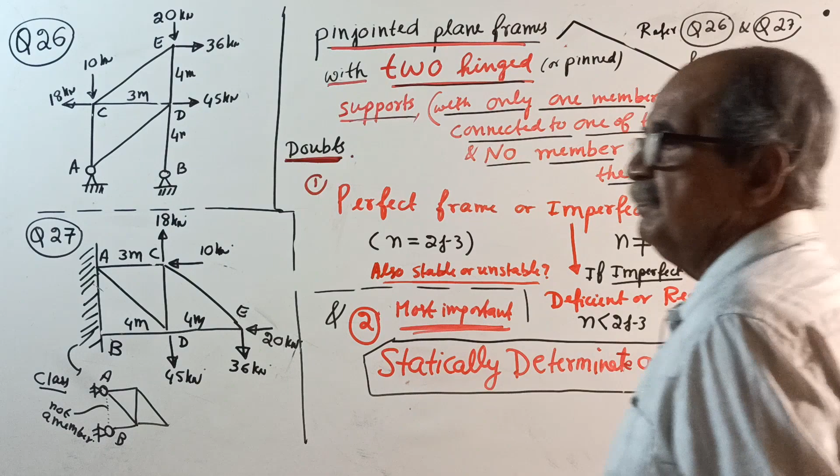Okay, now don't see this side. Never see this side now. Start from here. See, start here. Here start.

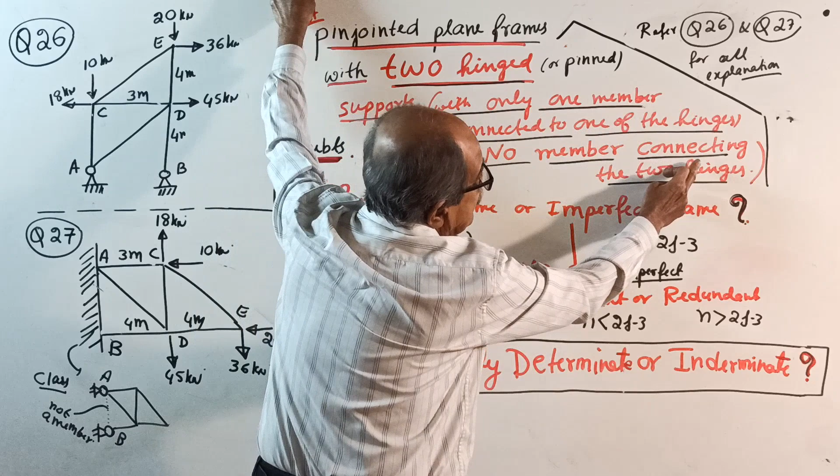Pin jointed plane frames with two hinged supports. Hinged or pinned, I will use the word hinge only. Two hinged supports with only one member connected to one of the hinges and no member connecting the two hinges. This is a special type, remember.

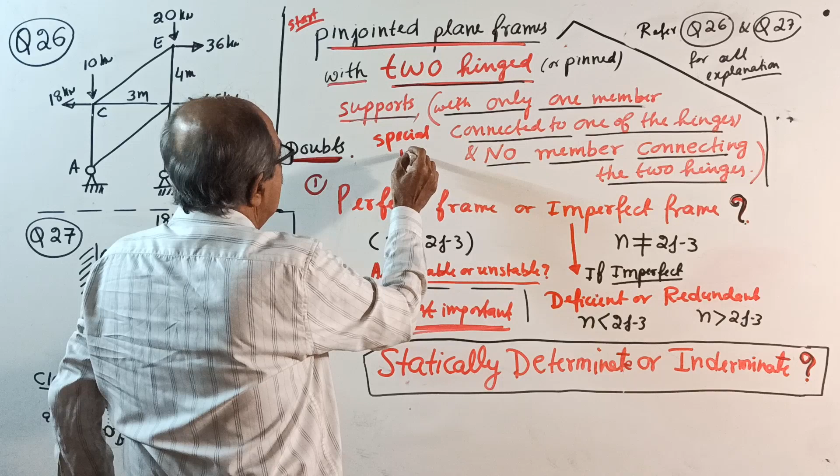You make a note here, this is a special type. See correctly. For thoroughly understanding, refer question 26 and 27.

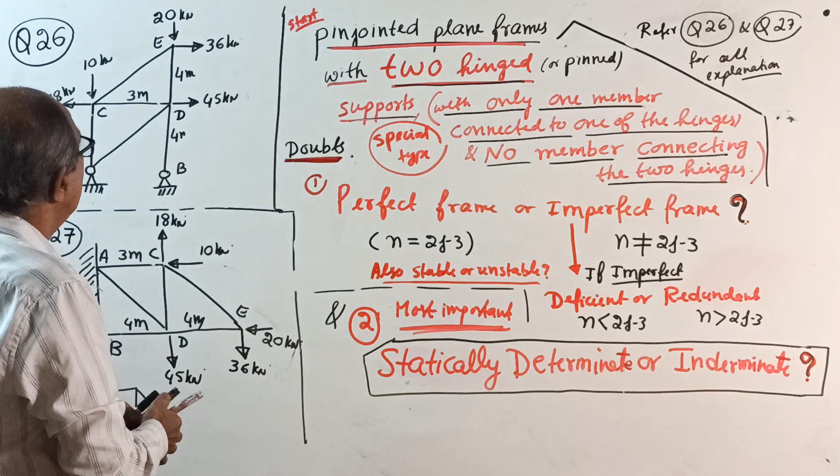Okay, now don't bother about those things. Pin jointed plane frame. See, actually one thing forgotten here. I will put it little later, then it will be more clear. Pin jointed plane frames with the two hinged supports.

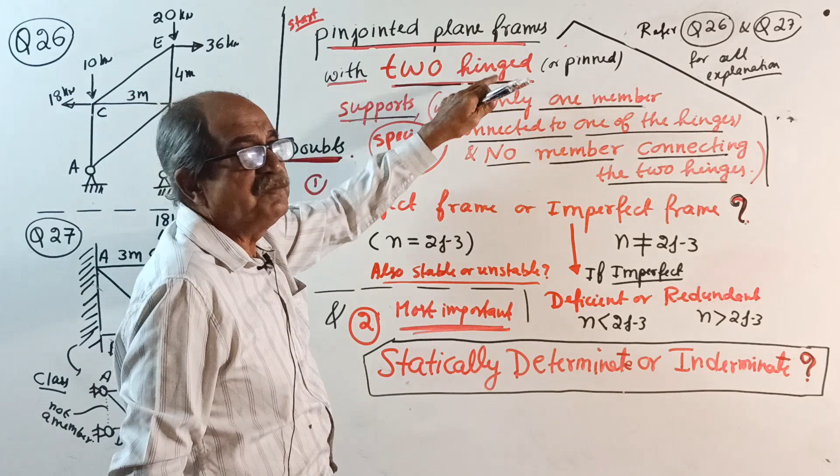See here, two hinges. Here, where are the hinges? Doubt comes, wait 1 minute. Right now refer 26, later 27.

See, with only one member connected to one of the hinges. Don't by heart A, B, C, D. See, to this hinge, only one member connected. This hinge, no problem, only one member connected.

And no member connecting the two hinges. See, there is no member there. No member here. Now see, come here. See this, make a note here.

Usually some special note, you are right. I will dictate only once. I decided now, later stages when this question comes I will tell you to go back and refer the starting class. When I give introduction, if you cannot refer there, study thoroughly and come here, but no, you can't come and ask me. I am not responsible. See, in beam question, make a note here.

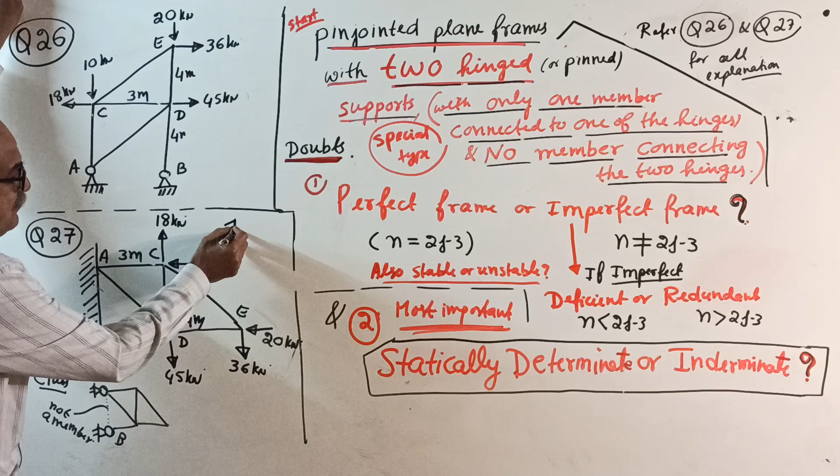If something given like this, we call it cantilever. This is a fixed support. Fixed support, which can offer vertical reaction, horizontal reaction, and reacting moment. This is the fixed support for a beam.

But remember, in pin jointed frame, support moment cannot come. Bending you are not considering, only axial forces. So if they give the question like this, then it is understood.

I will not tell once again. You go through this class again and again. Okay, understood that this A is not a fixed support. I have seen so many places they tell fixed at A. What is that common sense? It is not fixed at A.

Even if they give this way, it is hinged at A. This also hinge. And see, this is not a member. Remember, make a note here. Initially not given, write the sketch once.

See, now do one thing. This sketch you write once again. At that time you do one thing. See, you write once again this member. I'll tell how to write. You, after this one, write the question once again. Sufficient.

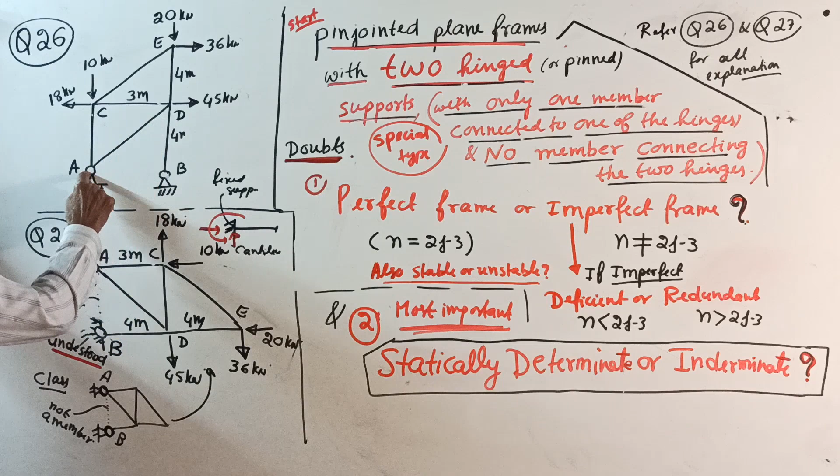Or now both are same. See here, two hinged support. Only one member connected to one of the hinges.

Yes, here I maintain the same. Actually, for both of them, answer is same. This is nothing but same frame turned.

Just to understand, see, only one member, you write here, upper frame. Through the hinge, right hinge, don't by heart A, B, C, D, right hinge. It can interchange. One of the hinges, see finger here, only one member. One of the hinges, only one member.

And the two hinges are not connected. Two hinges are not connected. See, not connected by a member. Okay, now naturally doubt comes. One, is it perfect frame or imperfect frame?

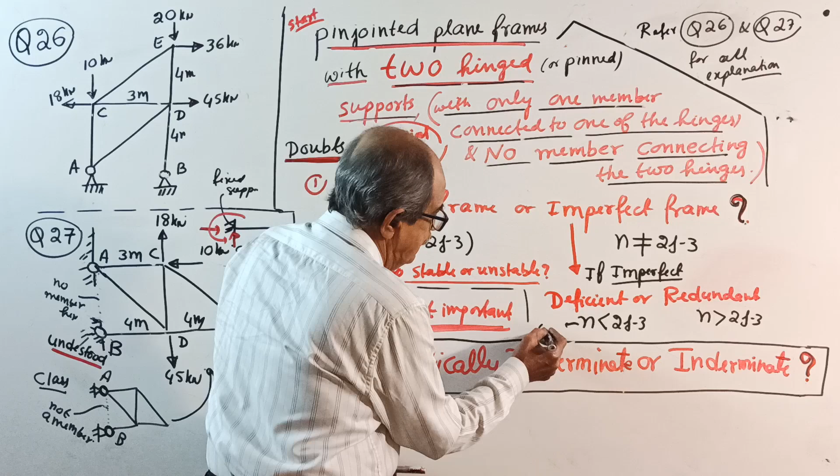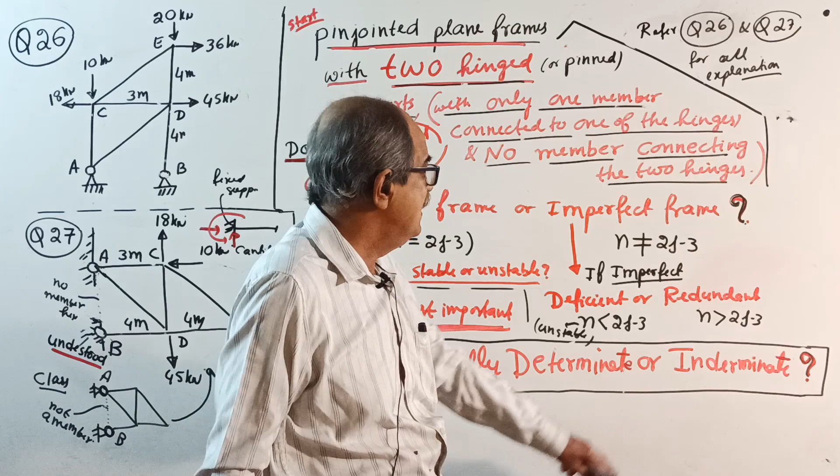This all I told earlier, go back to introduction class and come back. If n is less than 2j minus 3, deficient frame, shortage is there. If n is more than 2j minus 3, excess is there, redundant. And last doubt also, stable or unstable, these questions. This is special, two hinges, stay unstable.

Then most important, statically determinate or indeterminate.

These questions are 100% determinate. Why? These questions are given for first semester BE in engineering mechanics, usually in first semester. In some colleges, third semester BE covers structural analysis of pin-jointed frames by method of joints and method of sections. When given there, it should be determinate.

Why? What is indeterminate, you study at the end. If it is indeterminate, one more chapter comes later: analysis of statically indeterminate pin-jointed frames, called redundant frames, where you require the strain energy method.

You remove a redundant part, one redundant force, then find forces in members, called P. Introduce unit force in place of redundant, say K, then sigma PKL by AE divided by sigma K square L by AE, which gives the redundant force. Then force in any member equals P plus KX, or sometimes people call it KR. All this comes in structural analysis of indeterminate frames.

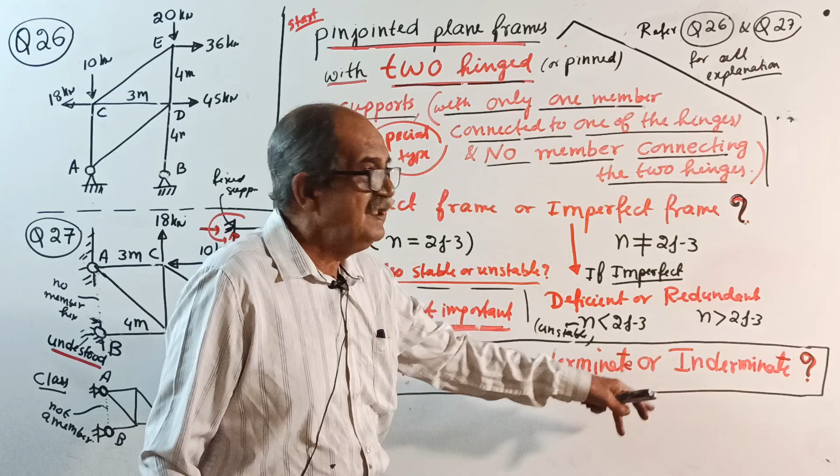Usually it comes in full study - moment distribution method, slope deflection method, Kani's method - these come in the final year. So you cannot give that answer there. If somebody questions you on determinate or indeterminate, you can tell them, sir, this question usually comes in engineering mechanics. Since it comes in engineering mechanics, it is determinate - they will not agree otherwise. That's what you write.

Now I will explain only once. I decided not to keep repeating the same thing again and again. From the academic point of view, I will tell the procedure. From the competitive exam point of view also, I will tell the procedure. Those who want to learn the subject need some explanation - explanation is for those who want to understand or want clarification.

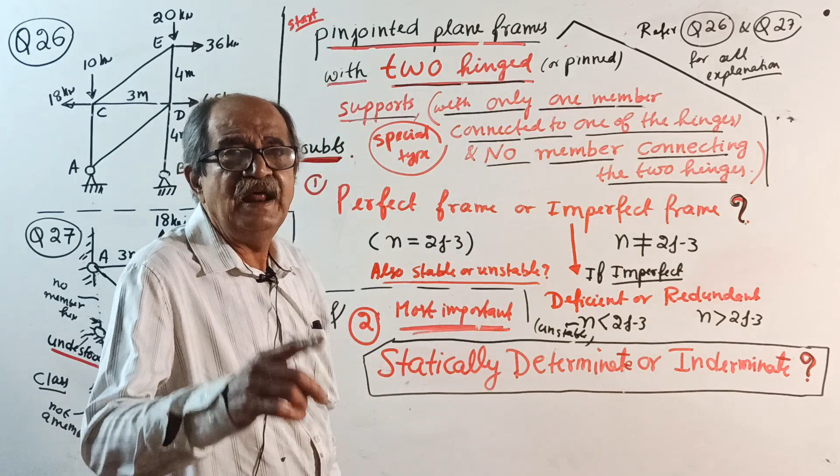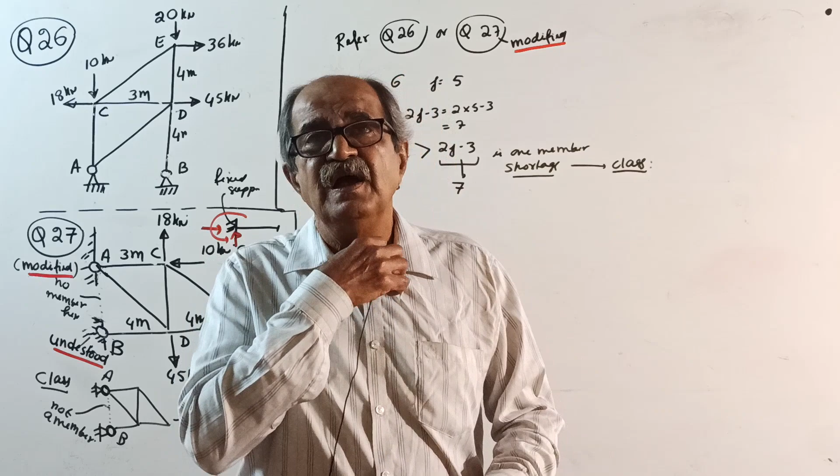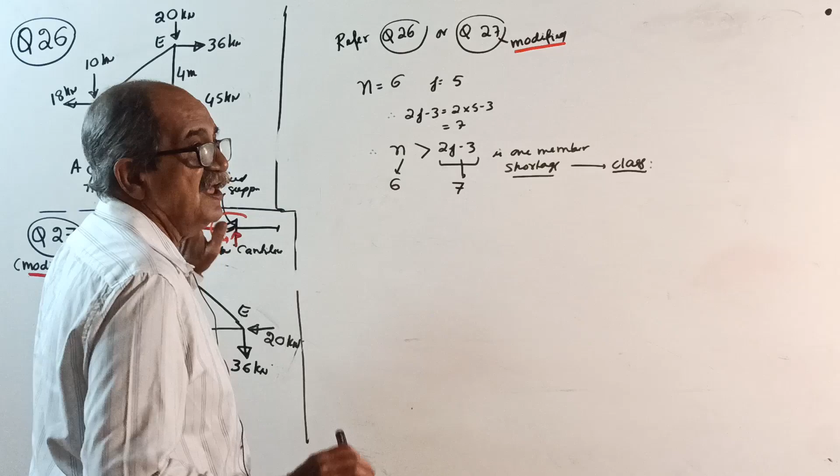Now I removed everything. I decided this because so many people studying engineering mechanics are in first semester, and if they go through all this it will be confusing for them. So I will advise them - today, these two questions I am solving, not this class but next class. I want these questions so that whatever I tell you, you understand.

At the end of this class, I will write the procedure here. You stick to the procedure, that is sufficient. Those who want it for competitive examination, same thing applies, but there some principles are involved, so better go through them. Those who want structural knowledge should go through everything.

Refer to either question 26 or question 27. Now, one more thing - these are all pin joints, understood. Write a modified sketch here. This also modify - there you show the joints are pins. This is a support pin. Okay, now see.

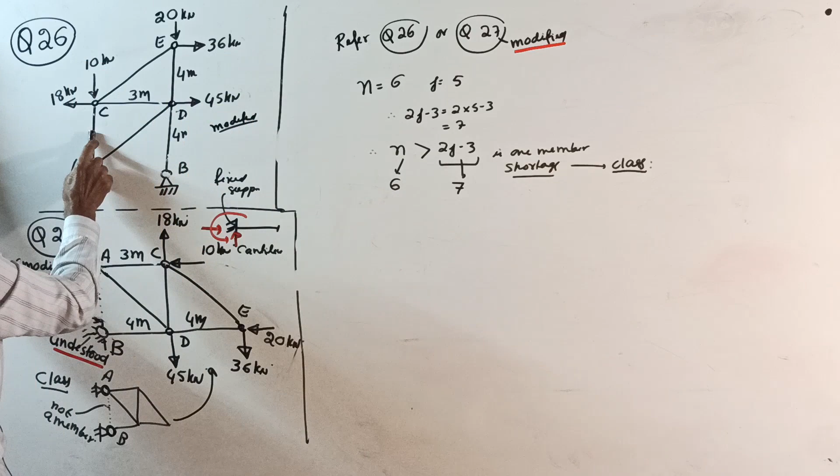Any question - number of members: 1, 2, 3, 4, 5, 6. I already told you earlier what N and J are.

Somebody will ask, sir, what is N? If you study the introduction class 1 and class 2, then come here, it will be clear. If you have no patience to go to the introduction class where I explained determinate, indeterminate, perfect, imperfect, deficient or redundant, stable, unstable - if you have no patience for that, then take care of yourself only.

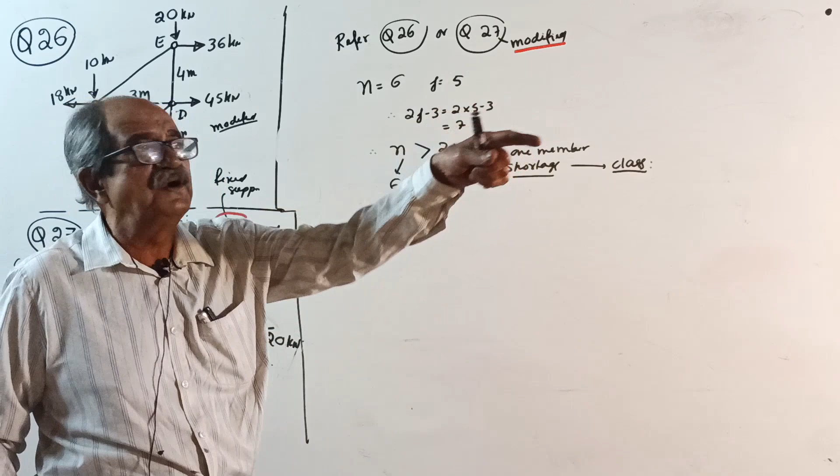Don't depend on me. I should give a strict warning. Such warnings will be more severe when I go to strength of materials onwards. When I enter the structural engineering field - engineering mechanics is common, even civil, mechanical, it's basically just physics.

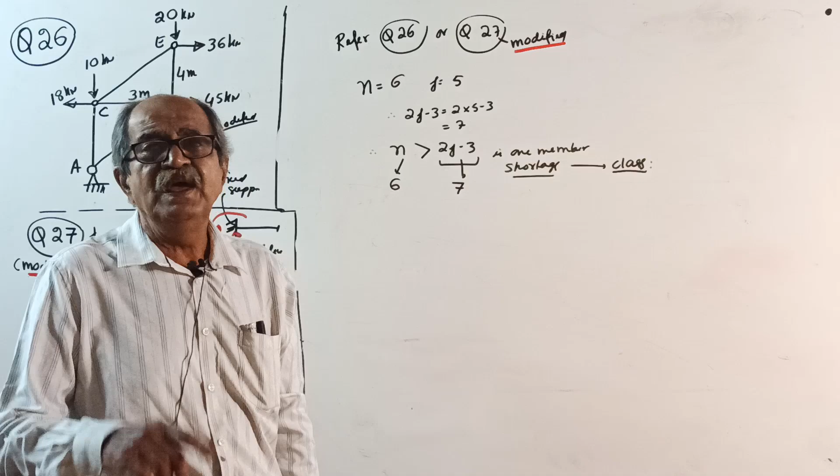When I enter structural engineering, I will give a very stern warning. If people don't turn up to class, some may think this person is talking arrogantly. I am not talking arrogantly - I am talking the way a teacher should talk. Others should listen to him, whatever he tells they should follow. If they have confidence in me, I think you will have confidence in me too, no problem.

Okay, number of members N is 6. Here also see: 1, 2, 3, 4, 5, 6. Put a modified sketch here - this is not a member, no member here. Modify this sketch, understood - there is no member here. So 1, 2, 3, 4, 5, 6. Here see 1, 2, 3, 4, 5, 6 or 1, 2, 3.

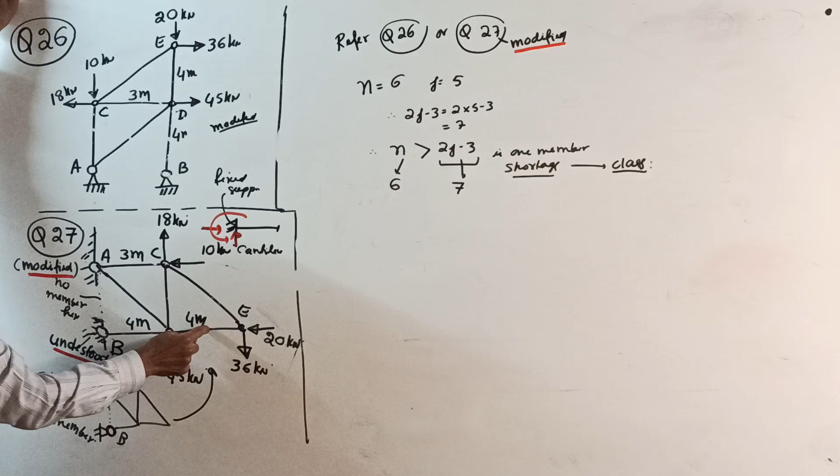Perfect frame requires n equal to 2j minus 3. But here, n is less than 2j minus 3. For perfect frame, you require 7 members, but we have got only 6 members here. One member shortage.

Common language, if you go by basic definition, n equal to 2j minus 3 is perfect frame, and n not equal to 2j minus 3 is imperfect. In imperfect, n more than 2j minus 3 is redundant, and n less than 2j minus 3 is deficient and also unstable. If n is more than 2j minus 3, it becomes statically indeterminate, and internally it becomes internally indeterminate. This I told on that day.

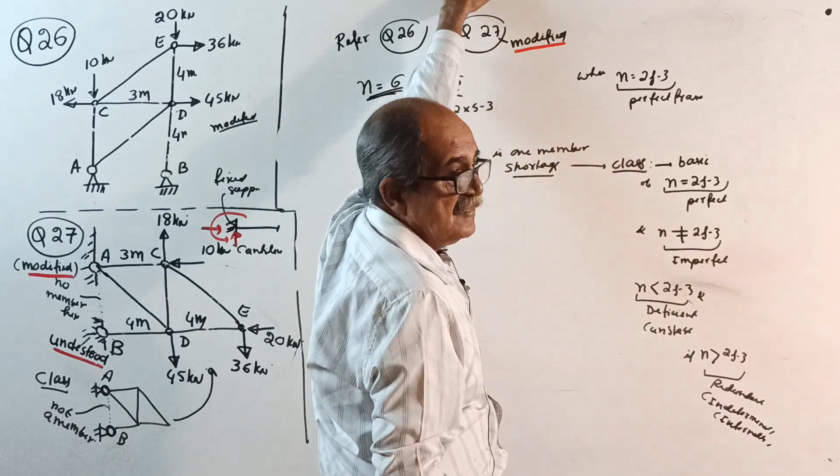So as per this basic statement, it looks like somebody will comment that it is imperfect frame, and thereby further it is deficient frame, and therefore unstable. That will come to the mind. You write all this, but no.

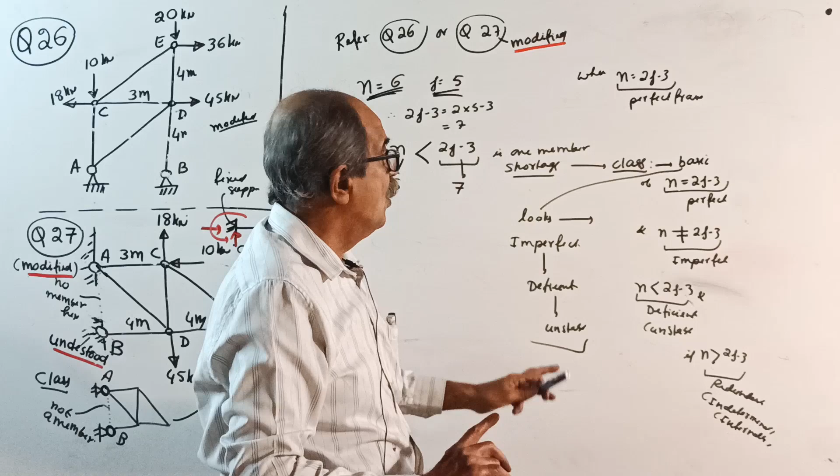You should be careful, no. Because I will tell you one thing. In any pin-jointed frame, if a member is present, connected at both ends to hinges, these are all logical and thinkable factors, then axial force in that member is zero. There is no force.

Reason I can tell, because there is no deformation for that member. In engineering mechanics, when you go to stiffness method, axial force equal to K delta, K is the stiffness AE by L, delta is the deformation. When there is no axial deformation for a member, there is no axial force, because if axial force is there, it will either shorten or elongate.

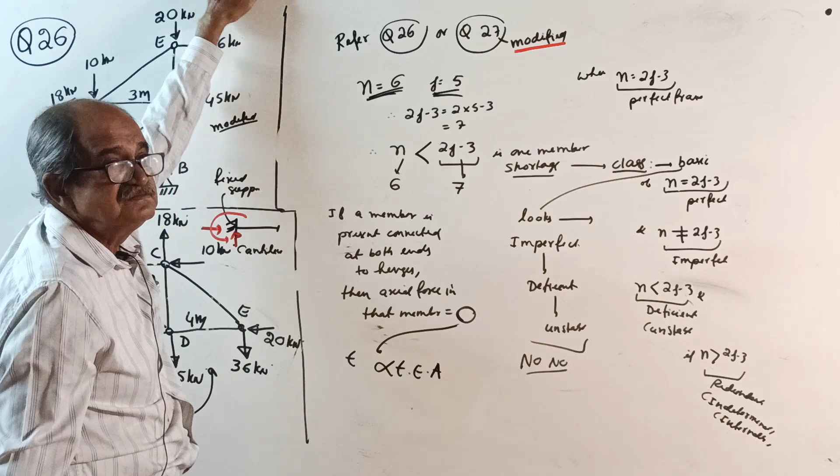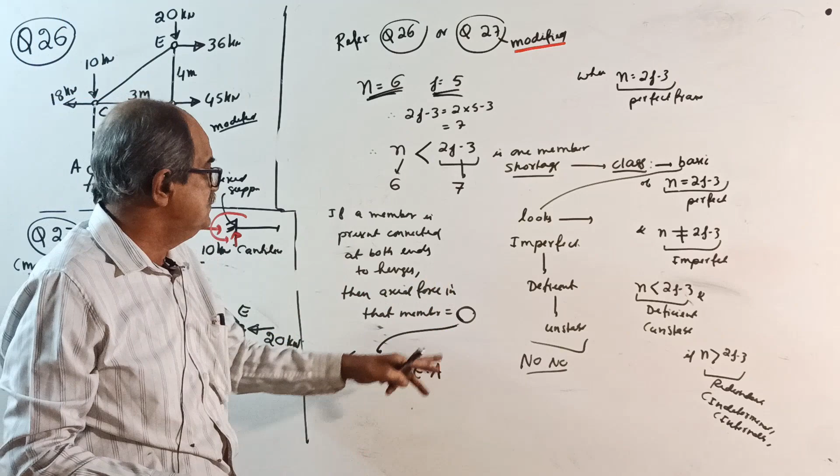Then the axial force in the member equal to alpha T is the strain, into E is the stress, into area. Why, do not bother. If there is temperature change for other members, this member has no effect, it is as good as not there. Zero means what? Zero means as good as not there.

It is not there. Zero, unless there is change in temperature for that member. Even then, it will not affect the other members. Force equal to alpha T into EA. Or there is a lack of fit for that member, say delta. Delta is the lack of fit. Then force in the member equal to AE by L into delta.

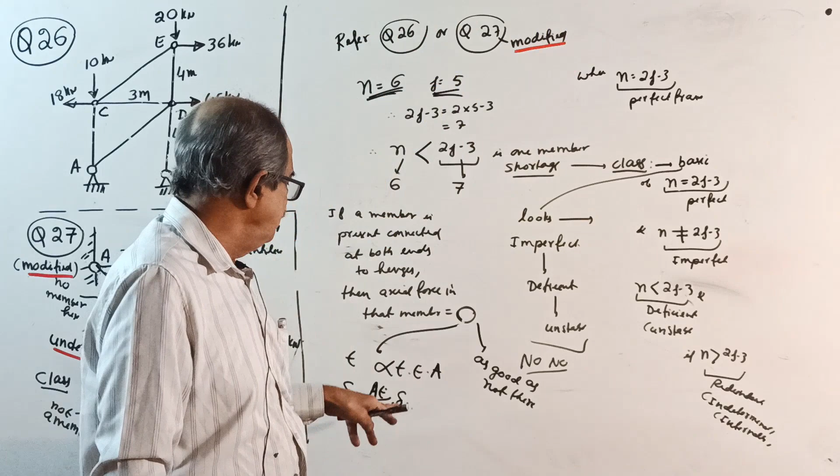For that, and because of that one, no force for other members. Lack of fit of other members will not have effect on this member. Or if there is support settlement, suppose any support settles, then effect will be there. Therefore, remember, this member and other ones will be separate. This is a separate group. This will tell, I am not with you. I am a unique member, I am a unique member.

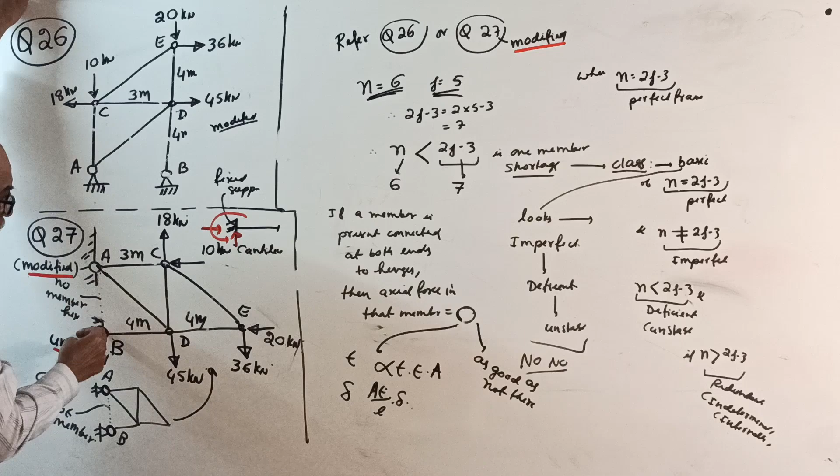If it is there, it will tell, I am a special member, I am not bothered about you. You do whatever you want, deform whatever you want, experience any change in temperature, experience any lack of fit. Unless there is temperature change for me, or lack of fit for me, or connecting support yields or displaces, unless it happens, I am zero force. If you want, you can consider me, I am there.

Because of that reason, what you can do is, you can imagine. For both the frames here, you can imagine, but do not provide it. You can imagine there is a member with zero axial force connected to the two hinges.

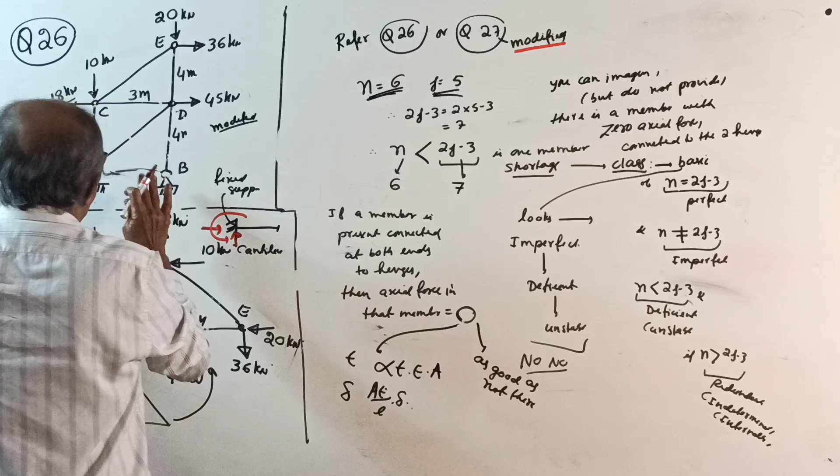You imagine a member, see, that is red color I'll put here. Okay, no problem, imagine I am there, but I am not participating. It is there, but remember, imagine, see, zero force. Put the sketches, later I put one more sketch actually.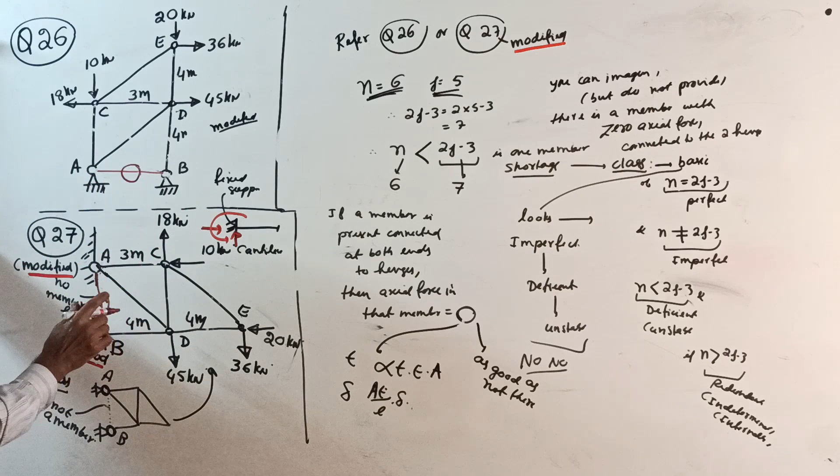Don't worry, you can take photograph if you want, but do not disturb original sketch. Take photograph of this one, then write. Therefore, you can call this frame as, now number of members will become 7. So now it will become 2j-3 also equals 7, so it becomes a perfect frame.

So this is internally, what happens now? Internally determinate. Actually, this is a very sensitive concept. I can talk hours together of this one, but sufficient.

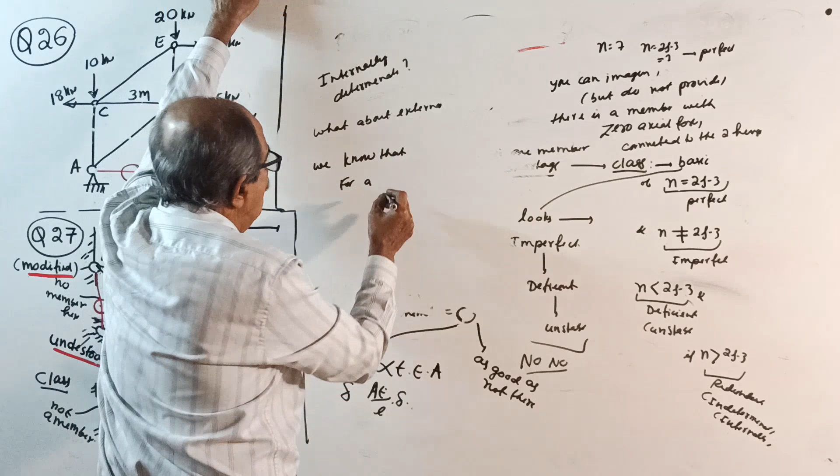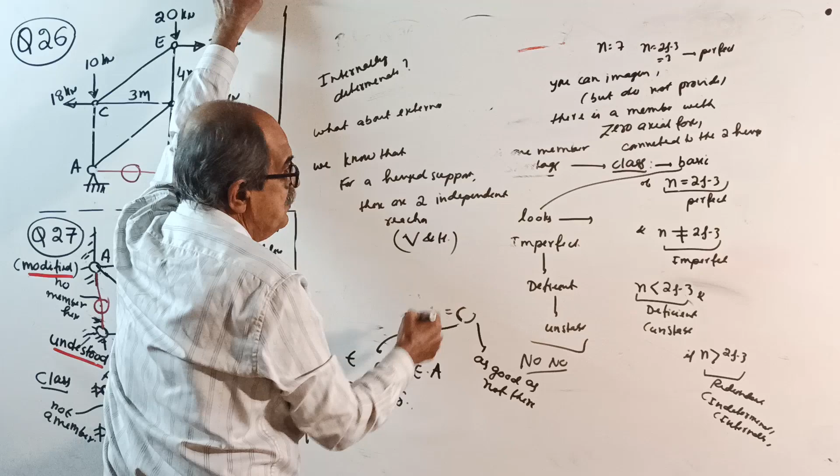Now one doubt comes: what about external? See, again doubt will come. See here, what about external? See, we already know that for a hinged support, I am telling only once, there are two independent reactions, namely vertical and horizontal. Usually you take vertical, horizontal, but you can take any direction.

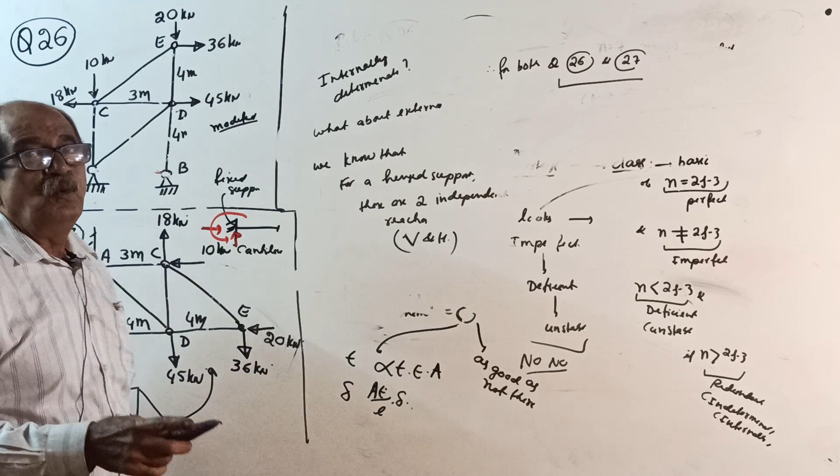Therefore, for both question number 26 and 27 or 18, not only these two questions, any question coming afterwards, any question where two hinged supports are given with only one member connect. See, now I'll remove this one. Where two hinged supports are given with only one member connected to one of the hinges.

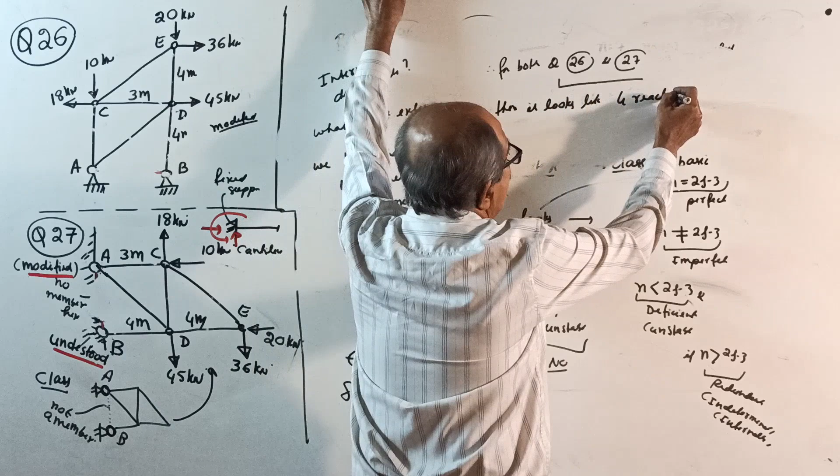Very important, right there, I put the condition. There it looks like 4 reactions. Why? 2 each. I already told you, for a hinged support, there are 2 reactions. So 2 reactions here, 2 reactions here.

Or if I refer to question number 26, what are VA and HA, VB and HB? See here, I'll put red color now. Only one question sufficient, see: VA, HA, VB and HB, random direction I am taking. VB and HB here if you want. See, I remove everything here.

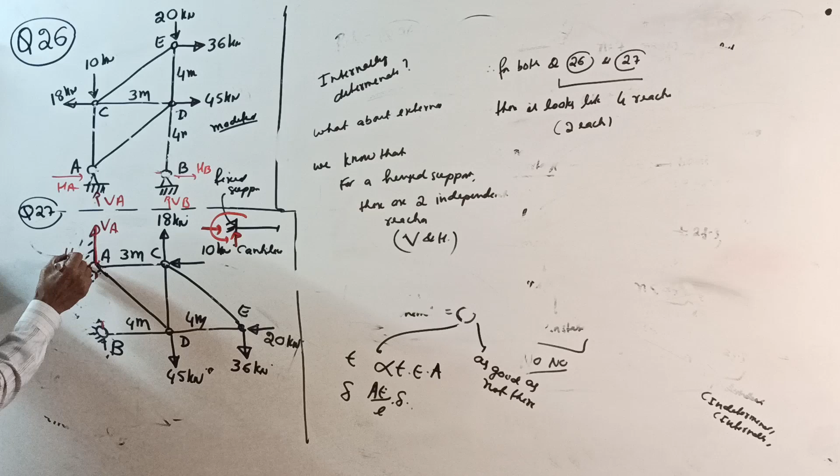See, question 27 I put here now. Question 27, come this side. Okay, see here: VA, HA, VB, HB randomly. Okay, that's what it happens.

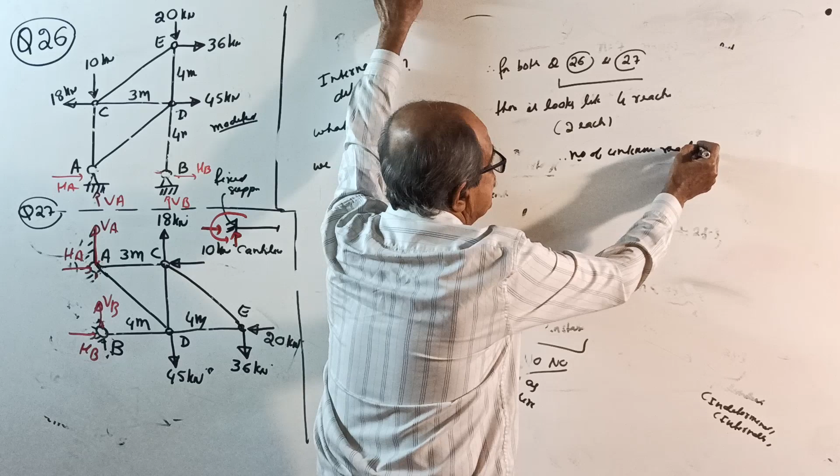Therefore, number of unknown reactions equal to 4. But number of basic conditions of static equilibrium is only 3. Which one? Sigma m equal to 0, sigma v equal to 0 and sigma h equal to 0. These are the 3 conditions.

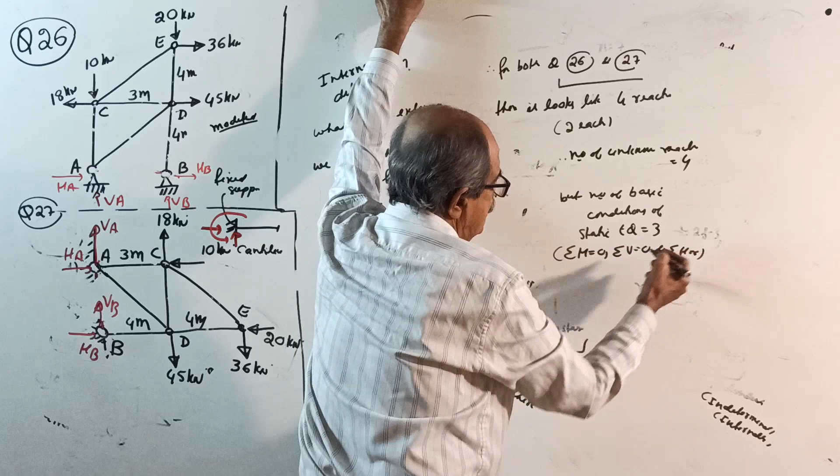So therefore, sudden feel, I am dictating, you should write: therefore suddenly to the mind, what comes is, unknowns are more than equations, it is statically indeterminate. The feeling will come indeterminate. Why? Unknowns, I told earlier, are more than number of equilibrium equations, it is indeterminate. So therefore, what comes to mind is internal. Therefore, internal problem solved, internal solved.

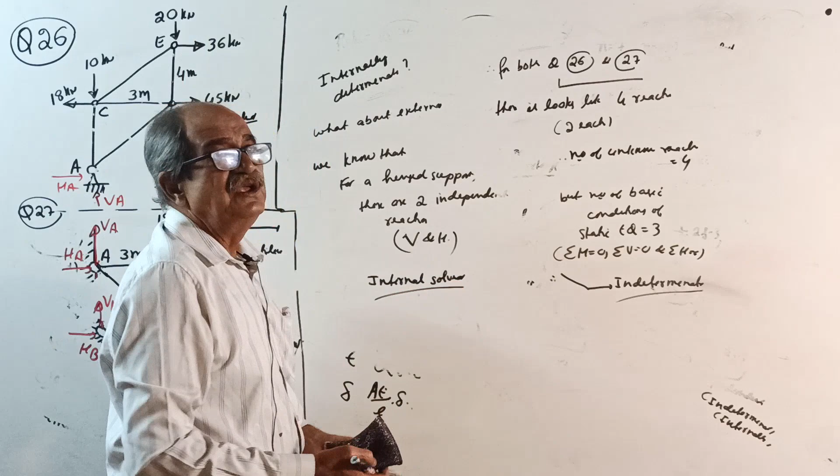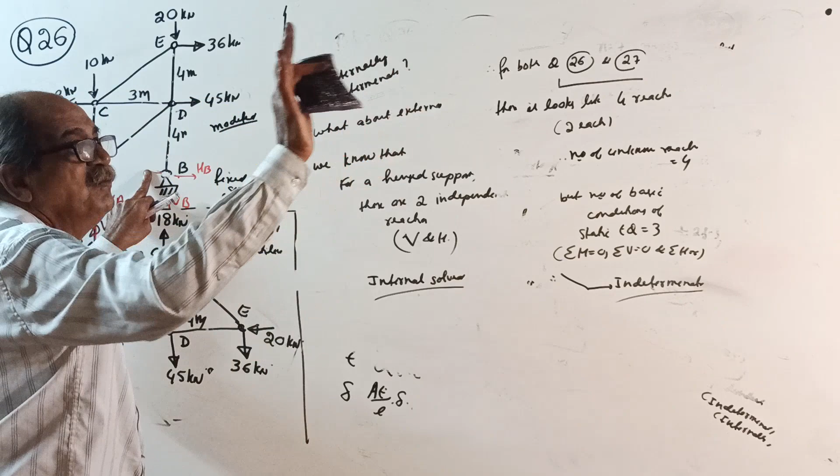Even if one member shortage is there, you can imagine a member there, an idle member. I will tell a member, you go there, I am not participating, you be there. For somebody who is counting, when they count, you be present. See, when they count number of members, you be present. Once they finish counting and go home, you also go home. Okay, done, agreed. So internally solved.

But externally, it looks like indeterminate to first degree. First degree, because all this will come later, don't worry. Those who want to understand the concept later, I am uploading a systematic way, I am explaining the degree of indeterminacy, all of it. So 4 unknowns are there, only 3 equations, 1 shortage, indeterminate to first degree.

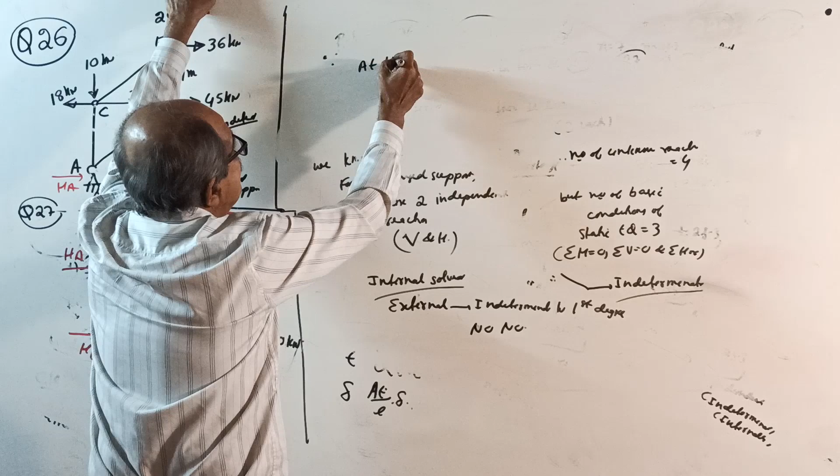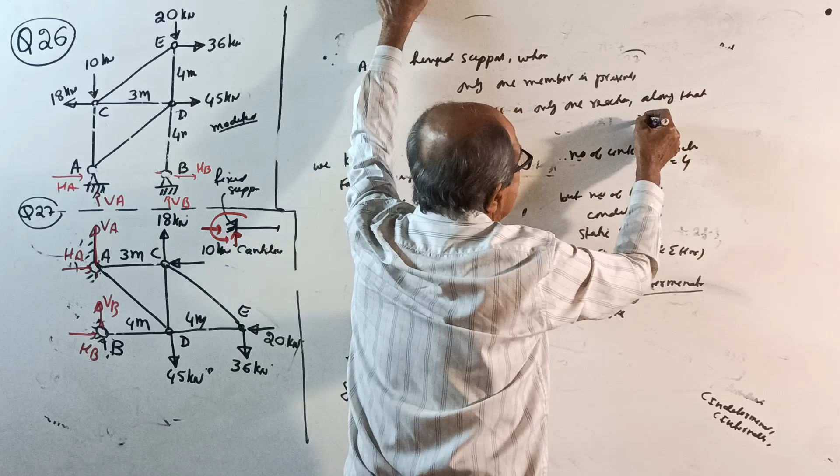No, again no. Because, see here, reason: because at the hinged support where only one member is connected, one member is present, there is only one reaction along that member. Because here, whatever is the axial force in the member coming here, this force, member force, is the same here only.

That is what? Here VB present, HB equal to 0. Here, see, HB present, VB equal to 0. Or common sense, see, again common sense will do. Common sense, see: anywhere you put a hinge here, that's all, no member. Apply, a member is there here, you apply a force here, member force, say P. If P is the member force, for equilibrium, just one reaction, see, P, reaction.

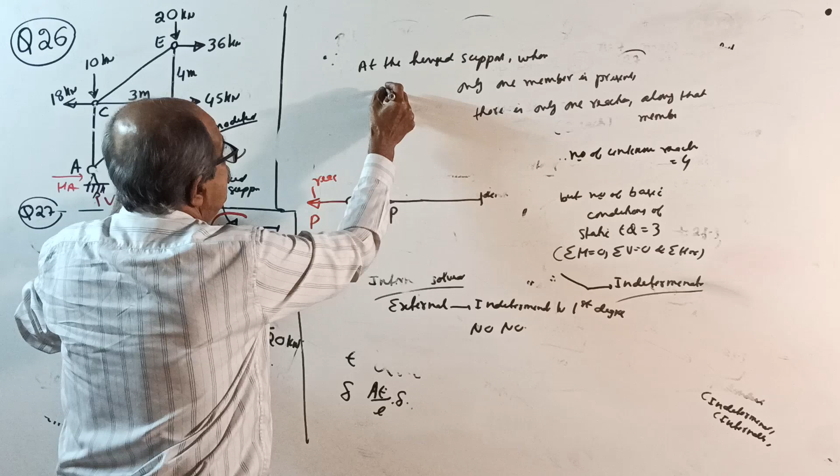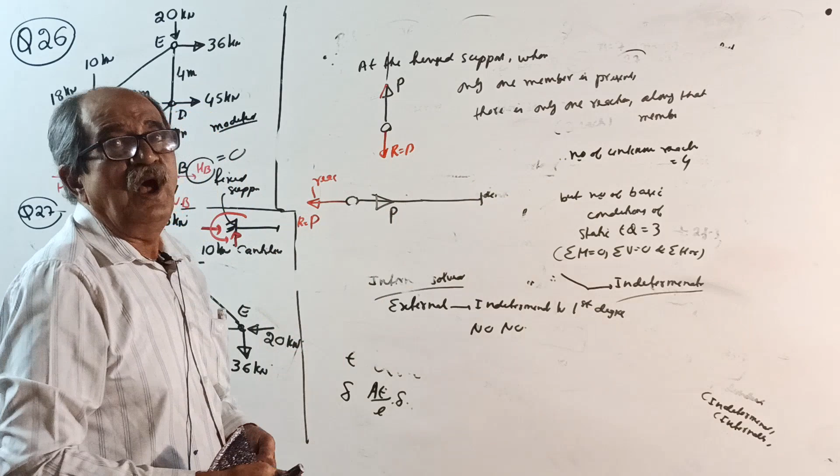Or see here, this point, this is for this case here. If this is the member, see, if this force is P, member force, then reaction is this way, reaction equal to P. So at the hinged support, where only one member is there, there is only one reaction, which is inline, collinear, or you can write here along the member, or in simple language, only one reaction, which is collinear to member.

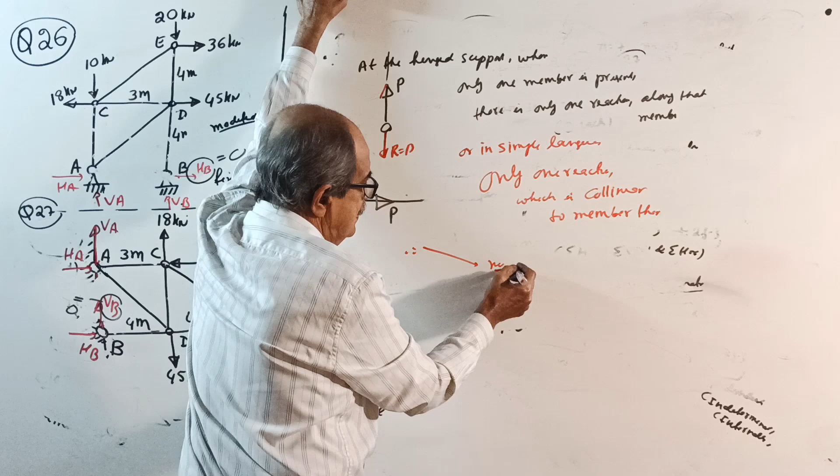Collinear to member there, only one member is there. See, not here, here 2 members are there, there no, here 2 reactions will be there. Only one reaction is there. Therefore, now number of reactions becomes, number of independent reactions become 3. Why? 2 for other hinge, and only one for that hinge, to which only one member is connected.

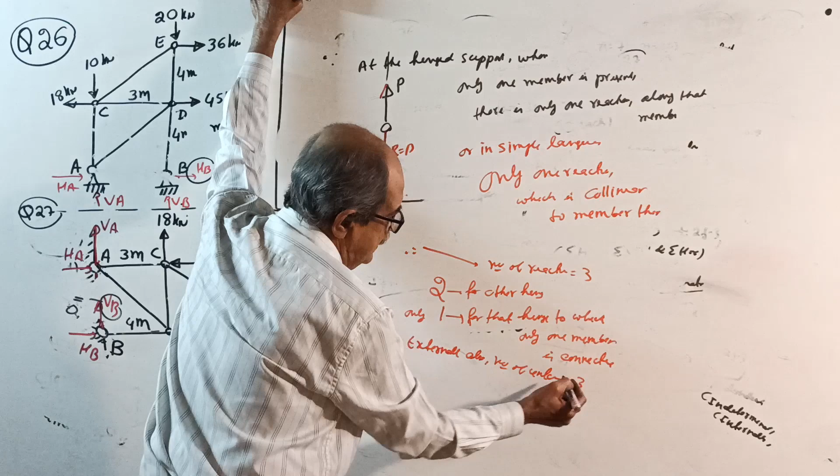Therefore, now the number of unknowns externally also is 3. Equilibrium conditions are also 3. Therefore, it is determinate.

These things you have to remember. I did not explain too much because this is not the stage to explain it fully. All this should be explained in structural analysis. Somebody studying engineering mechanics for academic purposes or a competitive examination may not be able to digest this. If somebody is interested in structural knowledge, he or she can understand and decide there is a specialist here.

Later he will go, attending his class, and decide to continue studying from him for whatever he teaches. I will tell you frankly, there are some students here - whichever course I conduct, they say they are coming again, sir, second time, third time even. They know everything already, but they still want to come to class, saying listening again will sharpen their brain and give more knowledge. Around 10 members keep coming for every class I conduct. They say instead of wasting time elsewhere, this is the best way to utilize time, not just pass it - utilizing time improves knowledge.

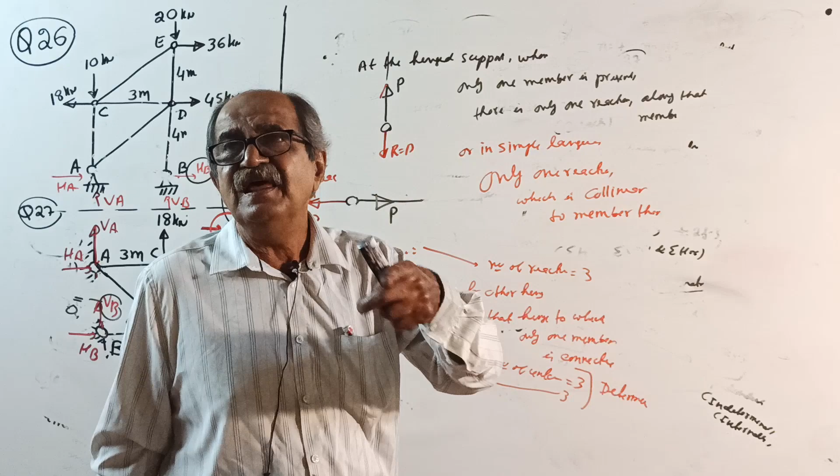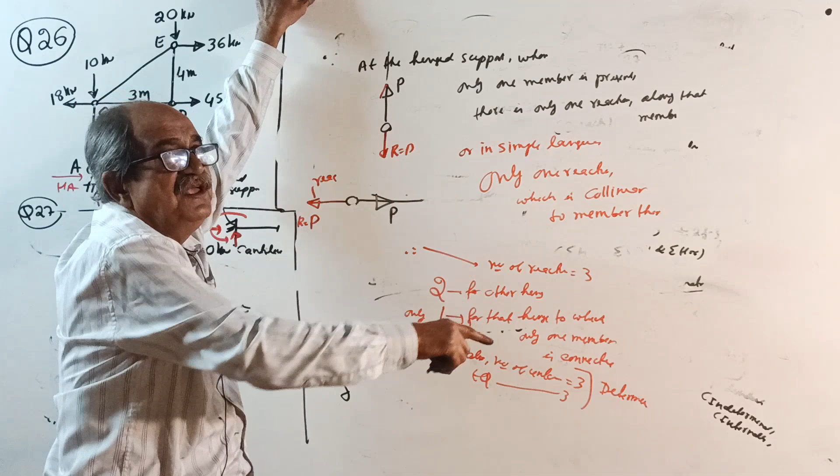Therefore, those who want structural knowledge, write this down. Later when he goes to indeterminate structures, and again to pin-jointed frames, your level of understanding will be much more by then, and he will explain all this once again, and you will understand better. Others who are not coming there, leave it.

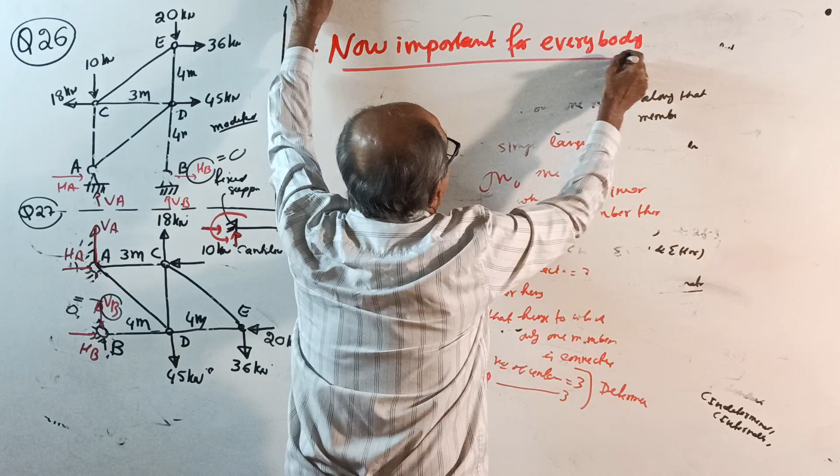So now I am giving you the procedure. See what matters most now - this is important for everybody, whether you are studying engineering mechanics for an examination in first semester or third semester BE in some college or foreign university, or going for a competitive examination requiring this, or you want structural knowledge.

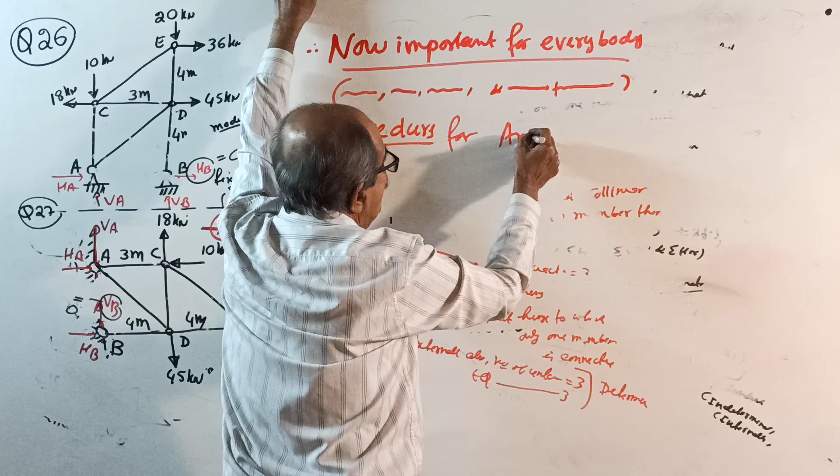Now, very important for everybody - I will give you this to write down: Procedure for analysis. Let me write it once again. I'll remove this and write the procedure. Next class I am solving this question - one minute, before that let me take a photo of this so I can write the question again next class. I will solve both questions following the procedure I give you, not just my own way of solving.

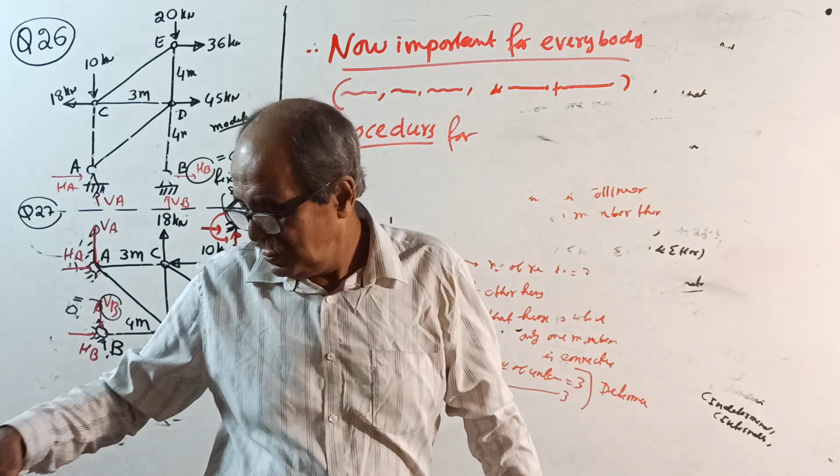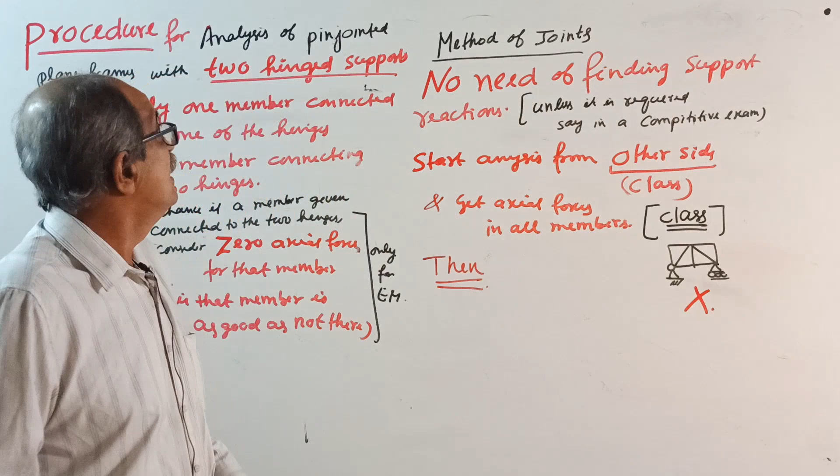See, now it's important for everybody. Procedure for analysis of pin-jointed plane frames with two hinged supports, with the conditions: only one member connected to one of the hinges, and no member connecting the two hinges.

One note here: if by chance a member is given connecting the two hinges, for engineering mechanics purposes consider zero axial force for that member - that member is as good as not there. Write it down, but don't treat it as a hinge and roller connection. If a single member connects the two hinges, write axial force as 0 for that member, meaning it is not considered, or you consider it and put 0 there.

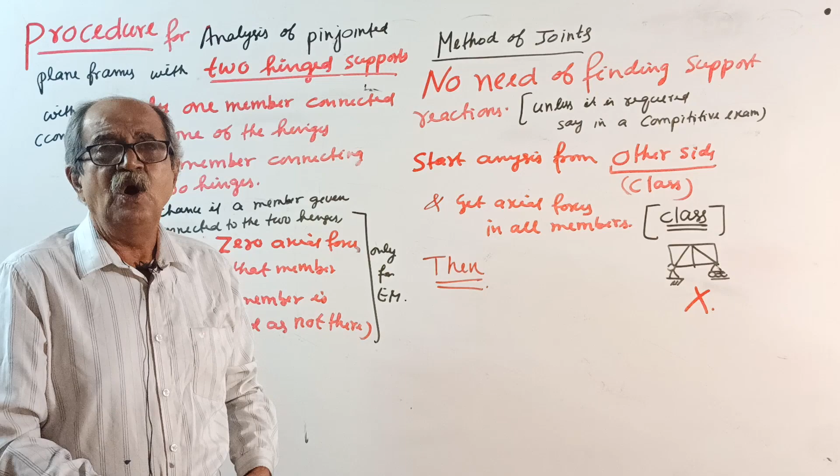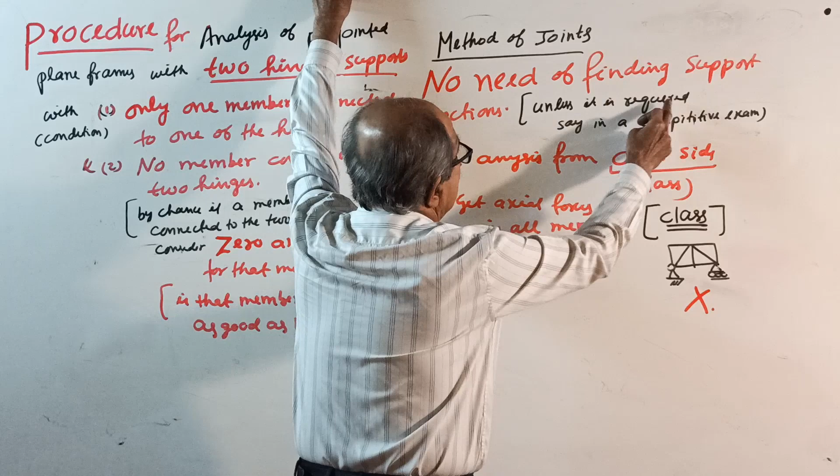Okay, now, method of joints. Method of sections I will tell you later - at that time I will not repeat all this, I will just tell you to go back. See, there is no need of finding support reactions unless it is required, say in a competitive examination.

So, what is the method of joints for? This is for finding axial forces in all members - write that as the purpose. I forgot to write it: method of joints is for finding axial forces in all members. If you solve by method of joints, there is no need of finding support reactions unless it is required, say in a competitive examination.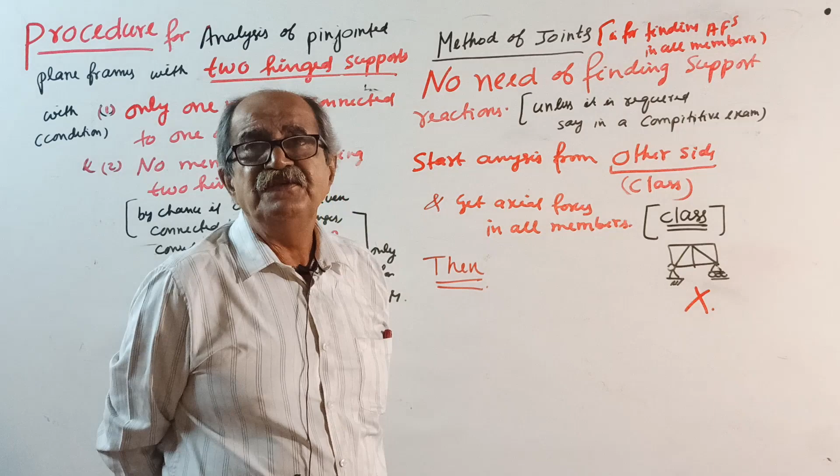One more note here. Suppose you try to find, you cannot find. Why? Unless you know that special concept of single reaction for that hinge, you will consider two reactions, and you cannot find - unknowns are 4.

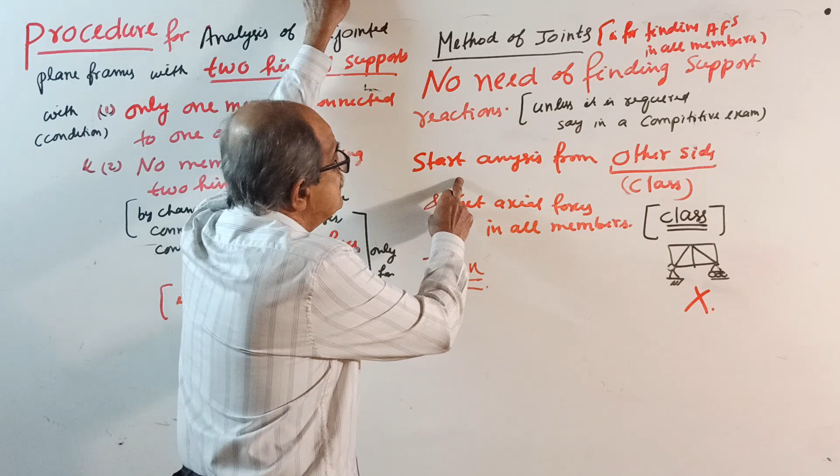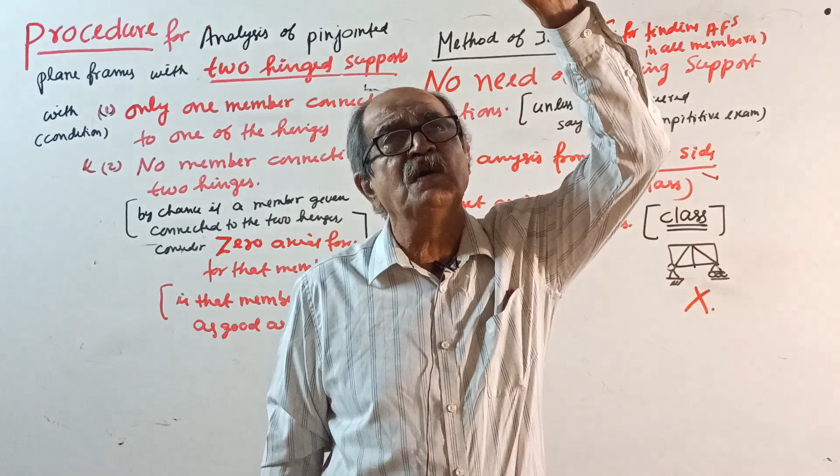So no need of finding support reactions. Then how to start? Start analysis from the other side. In method of joint, you consider equilibrium of a joint having not more than 2 unknowns. If the 2 hinges are on the left side, start from the right side. If the 2 hinges are on the right side, start from the left side. If the 2 hinges are at the bottom, start from top. If 2 hinges are at the top, start from bottom - other side. Do not even touch the 2 hinges, tell goodbye.

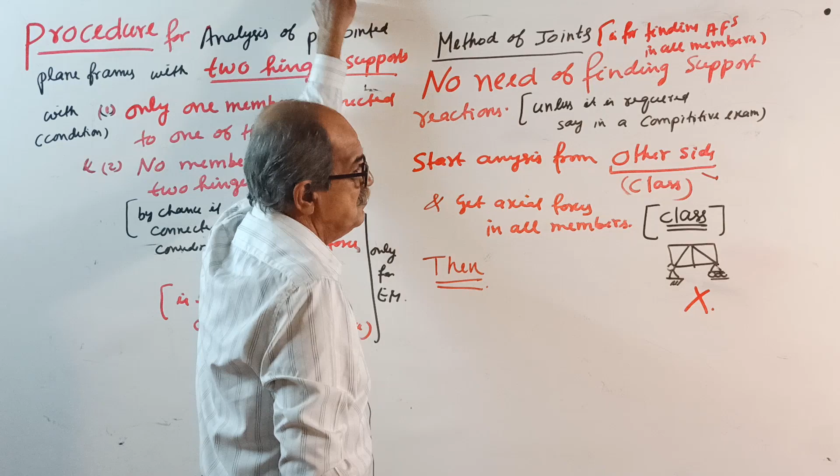Start analysis from the other side and get axial forces in all members. But remember, not for this question - this is hinge and roller. Here you have to find reaction. Why? Because one hinge, one roller - unless you find reaction, you can't start from anywhere. One hinge, one roller, you have to find the reactions, compulsory.

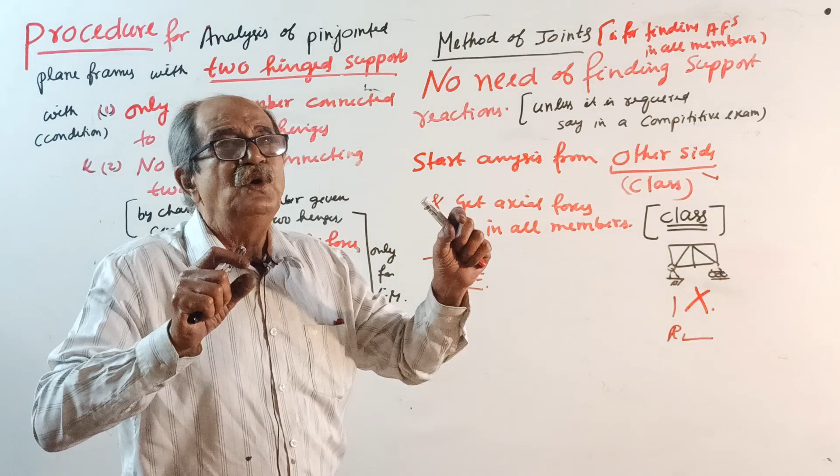25 questions are over. This is a special case I am telling: 2 hinged support with only one member connected to a hinge and no member connecting the 2 hinges - get axial forces in all members.

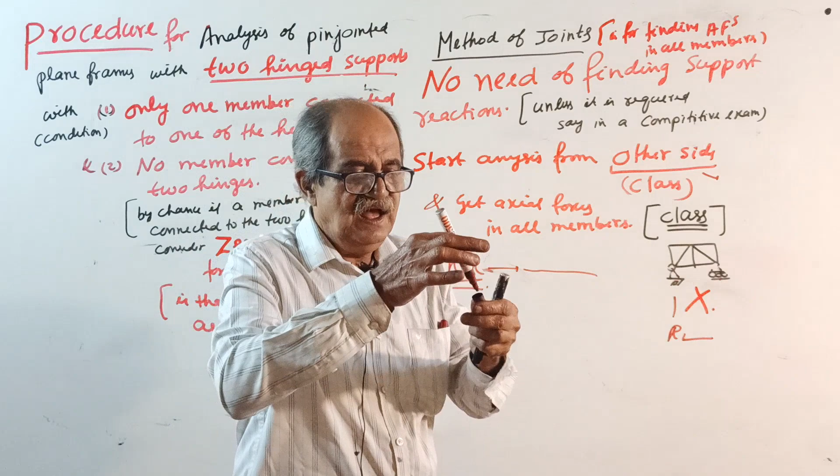Then see, if the question is only to find axial forces, you write, our work is over, stop, go to next question, or go for tabulation. If the question is to find only axial forces, yes, we finished it, over, leave it.

But if the question is to find axial forces and also support reactions, then using that axial force calculated for the members connected to the hinges, you can find support reactions right there. I will explain in the class, in the example - I can't explain here now.

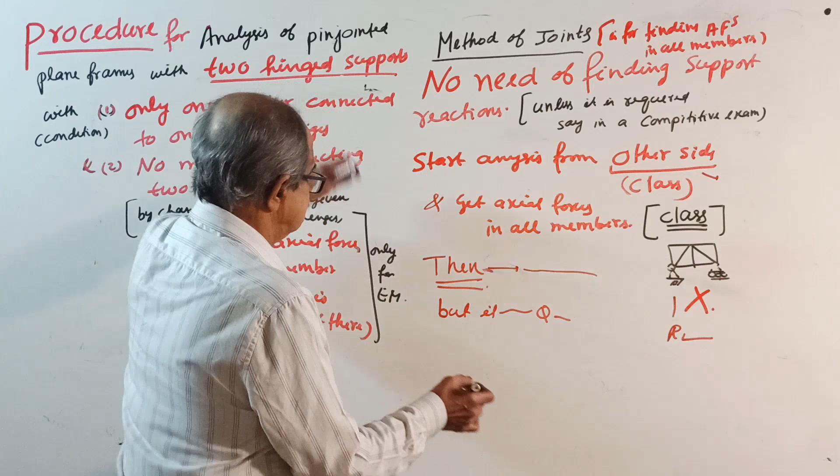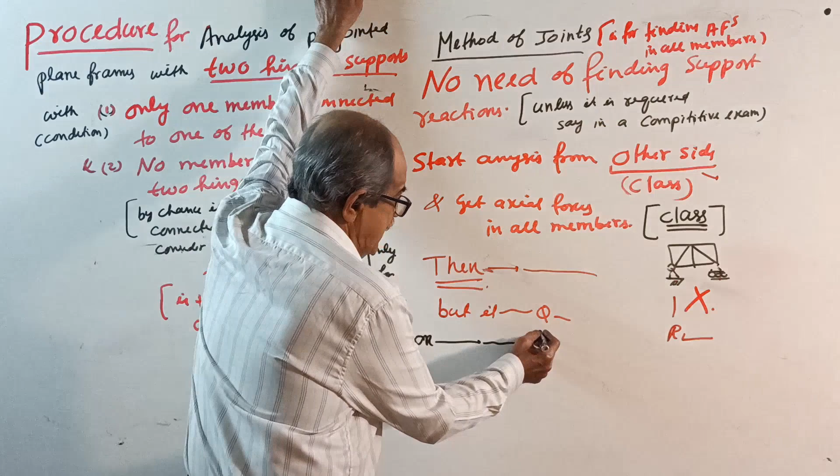Or suppose in an examination, say competitive examination, they ask reaction, no axial force required - then you can't waste time. What you do is find support reaction like earlier, but that hinge where only one member is connected, you consider only one reaction which is collinear with the member. Okay, write all this note.

I have dictated now, this is a procedure for method of joint. Sufficient, I do not want to make more complications. Those who find difficulty, wait for next class - I am solving question 26 and 27, both identical questions, so it will be fully clear. This part is required; the earlier part is logical or theoretical, that is for your choice, if you want you can study.

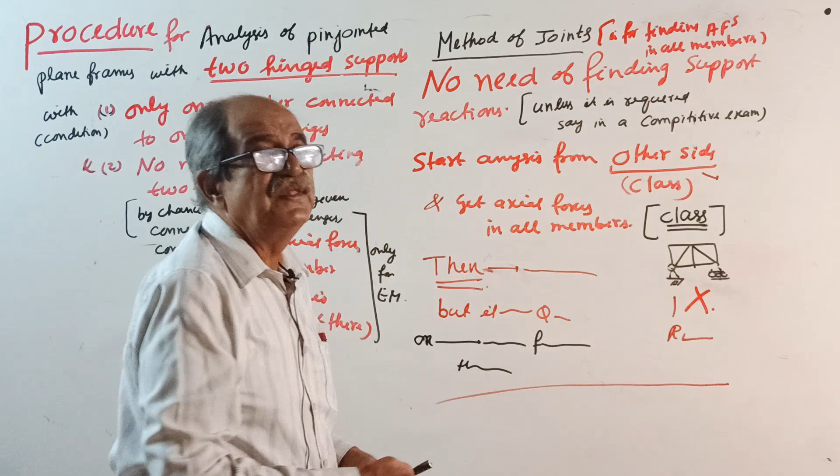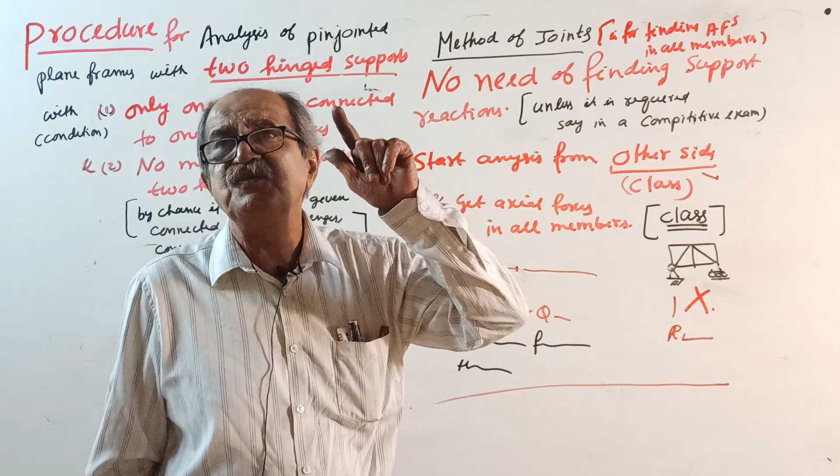So I will tell once again: method of joint, start from other side. Start considering joints from the other side, then slowly come inside. When all members are over, stop - if the question is to find only axial forces. But if the question is to find axial forces and also support reaction, some tricks are there: using the axial forces calculated for those members connected to the hinges, you can find support reaction. But if the question is only to find support reaction, you can't waste time on axial forces.

Then for a 1 marks question, you find the reaction in the earlier way, but that hinge where only one member is connected, only one reaction, collinear with the member, and enjoy. If any doubts are there, see solution of question 26 and 27, then come back and study and understand.

Furthermore questions I am solving - 26, 27 are basic questions, then 28, 29, 30 are same type of questions where I will not tell the whole story, I just write the question and solve. That's all, so it's the theory part.